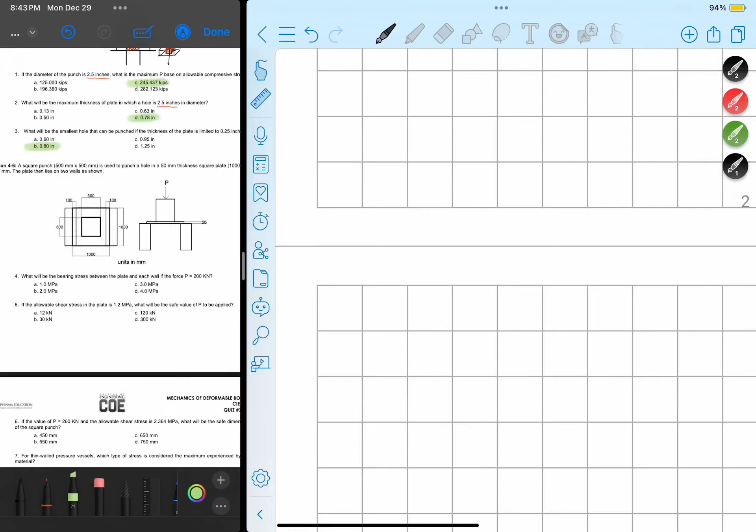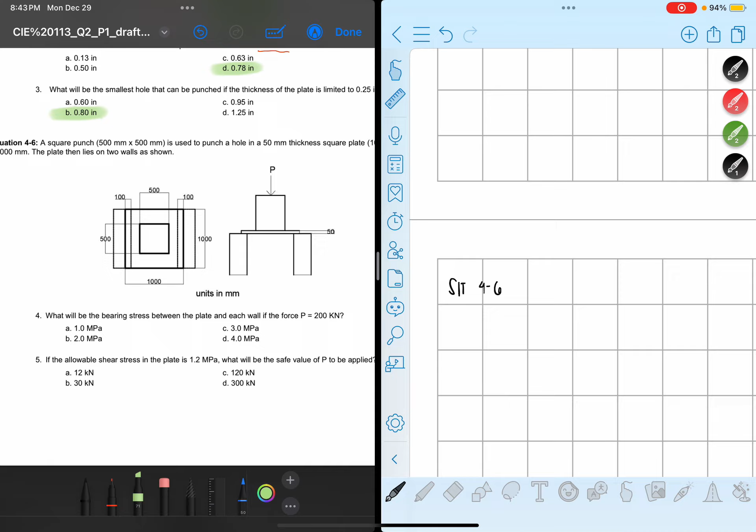Okay, for this problem, situation 4 to 6. We have a square punch, 500 millimeter by 500 millimeter. Ito yung square punch na tinutukoy natin. In top view, asan may 500 by 500 yan? Ito, yan yung 500 by 500 natin na punch.

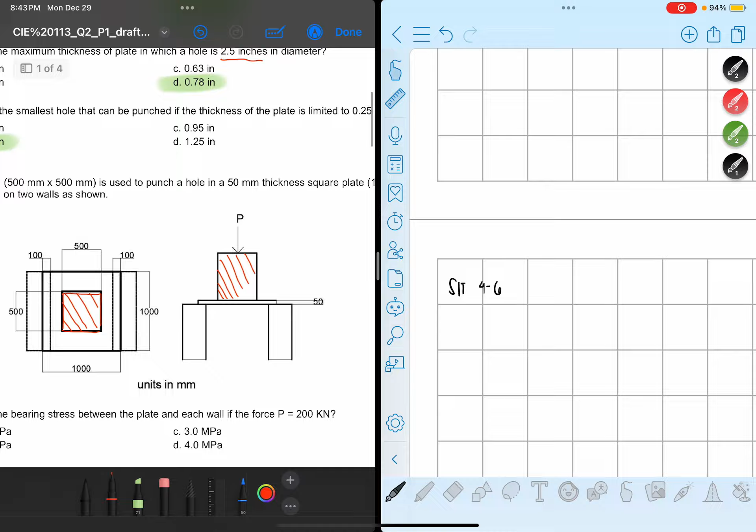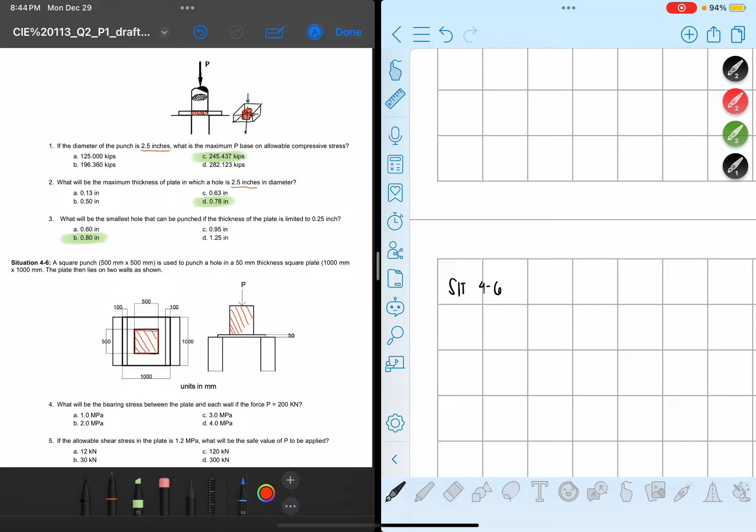This is used to punch a hole in a 50 millimeter thickness square plate. Nakalagay na lahat dyan, pero i-isa-isa natin. So, 1,000 millimeter by 1,000 millimeter, yun yung dimension ng plate natin, 1 meter by 1 meter. Then the plate lies on two walls as shown. Ito yung wall na tinutukoy ko sa inyo. This is your wall.

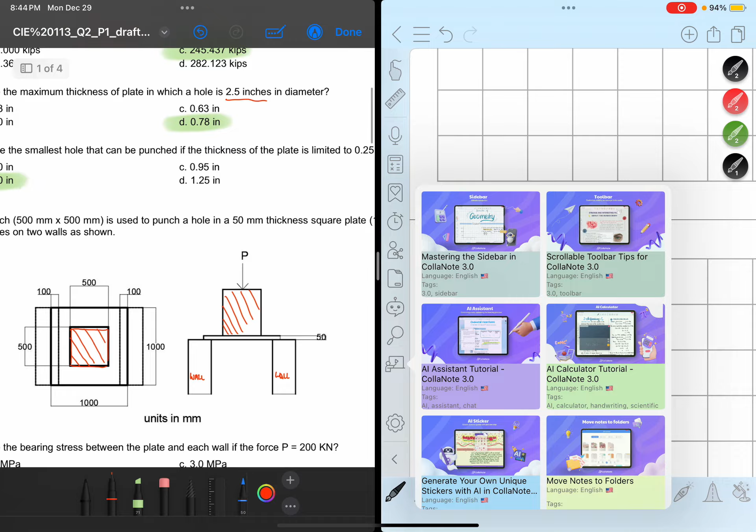Now isa-isahin natin. For situation or problem number 4, ang tinatanong sa atin, what will be the bearing stress between the plate and each wall if the force is 200 kilonewton?

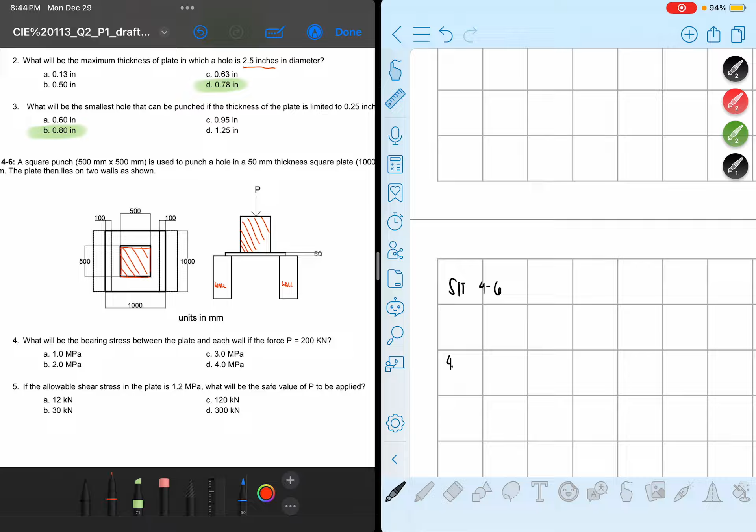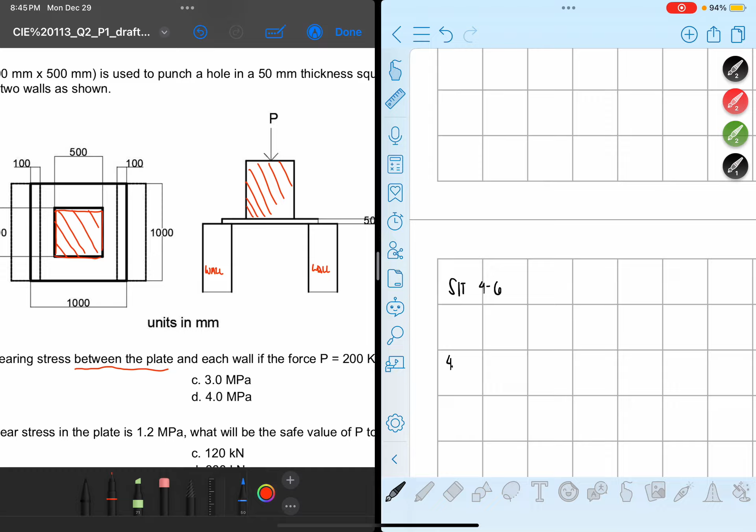Nalito na sila sa bearing stress. Tingnan nyo mabuti, pag merong sinabing bearing stress, is the contact stress between two different bodies. Sinabi na dyan, between the plate and each wall. Actually madali lang tong problem kung na-analyze nyo mabuti. Ibig sabihin, nasaan yung contact area natin dito? Asan mo muna yung plate?

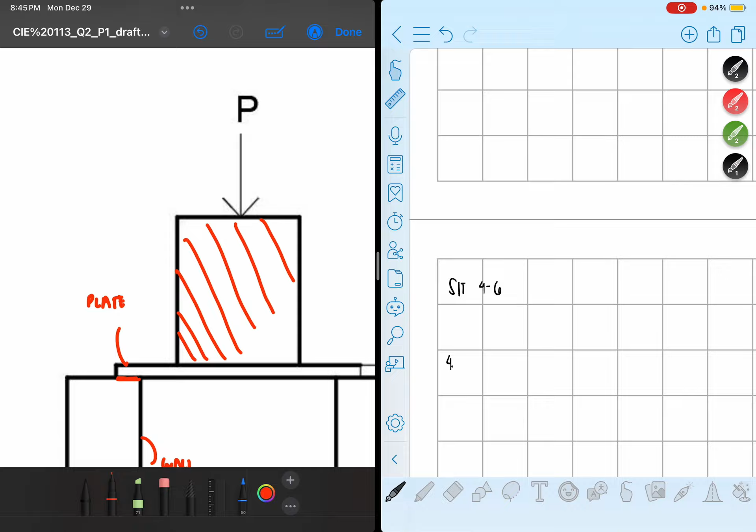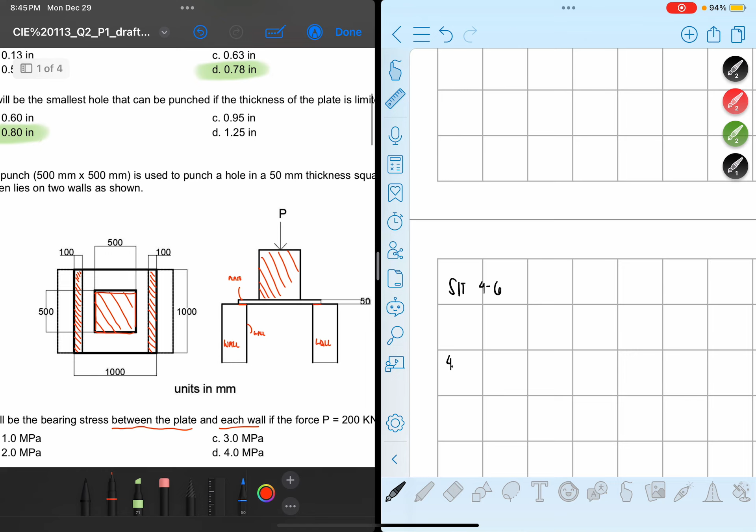This is the plate, this is the wall. If the bearing stress is the contact between two opposing bodies, pwede ko bang sabihin na ang area natin na kino-consider is ito? Pag ganyan yung view, at sa top view naman, pwede ko bang sabihin na ito yung area na yan? Kasi yun yung contact area nung ating plate at ng wall. Isa lang naman ang tinutukoy sa atin.

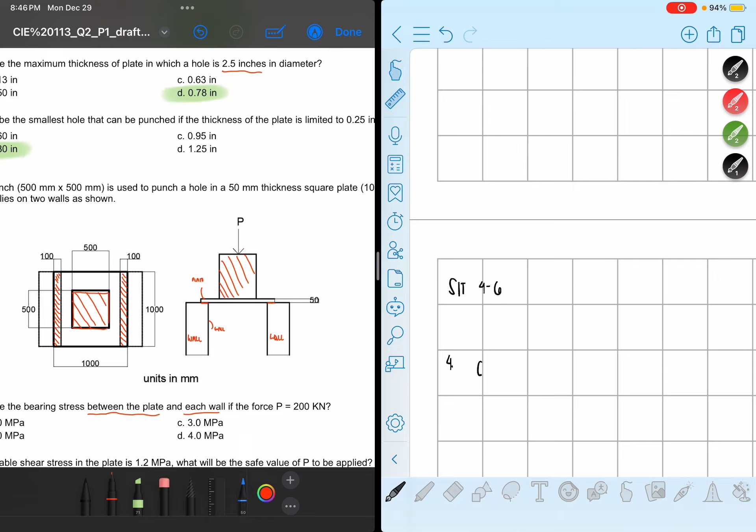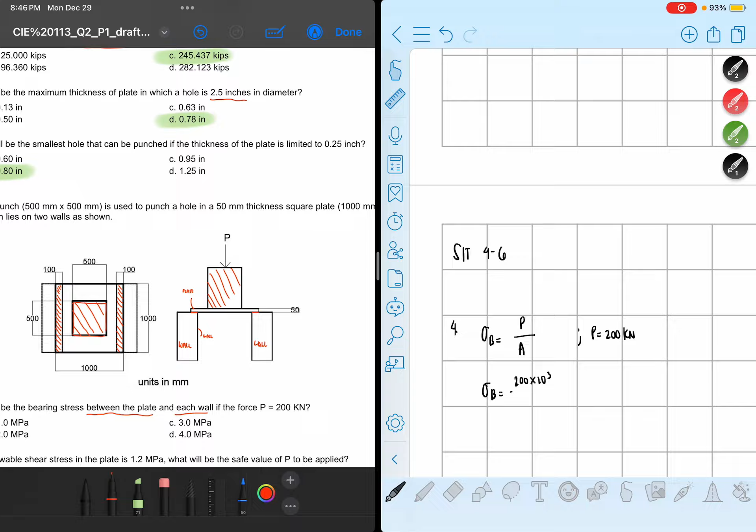Ngayon, paano natin mahahanap yung force dyan? Pag ginamit mo dyan is force P. Tingnan nyo mabuti, titingnan natin muna. Siyempre, bearing stress yung hinahanap natin, so we have force over the area. Ang force na tinutukoy natin, ang P, is 200 kilonewton. So we have 200 times 10 raised to 3. Sige, gamitin natin yung area na sinasabi mo.

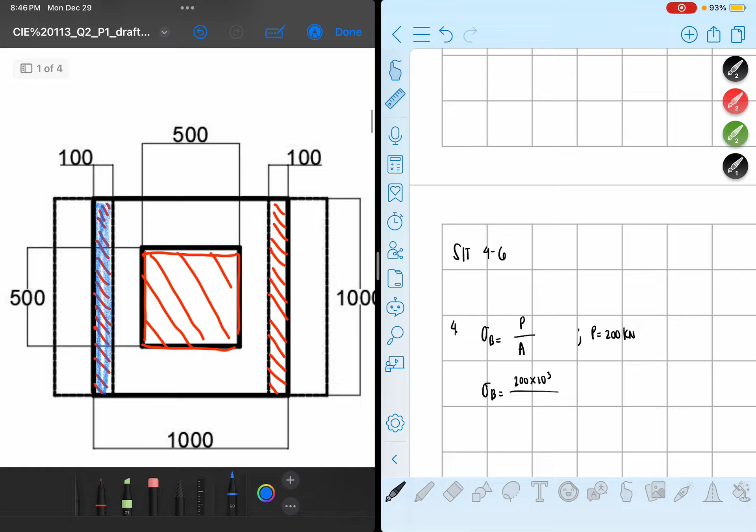Ibig sabihin, yung area na to, i-green ko, yung area, ano ba? Yung blue na yan, is simply madali lang, 100 times 1,000. Ibig sabihin, ang makukuha ko dyan is simply equal to 200 times 10 raised to 3 divided by 100 multiplied by 1,000. So ang makukuha ko dyan is 2 MPa.

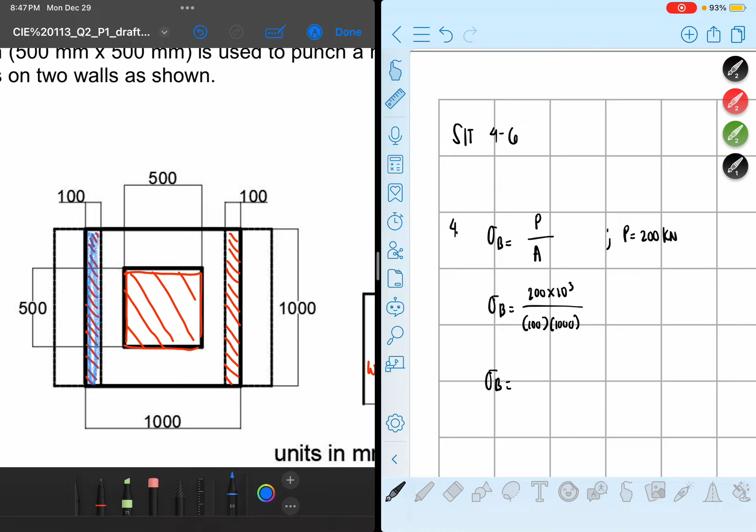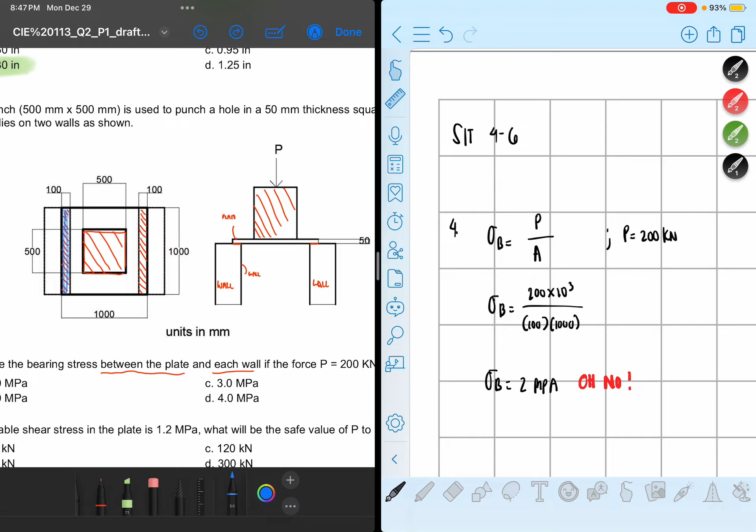Wow, lumabas sa sagot, pero mali. 2 MPa, lalagay ko dito. Hulaan nyo, oh no, okay bakit po mali? Kasi guys, kung tatandaan nyo mabuti, if bearing stress ang pinag-uusapan natin, always lagi naman to, kahit hindi bearing stress, kahit normal stress lang tayo, tatandaan nyo na kapag gumagawa kayo o nagsosolve ng mga stresses, always make sure na meron kayong free body diagram.

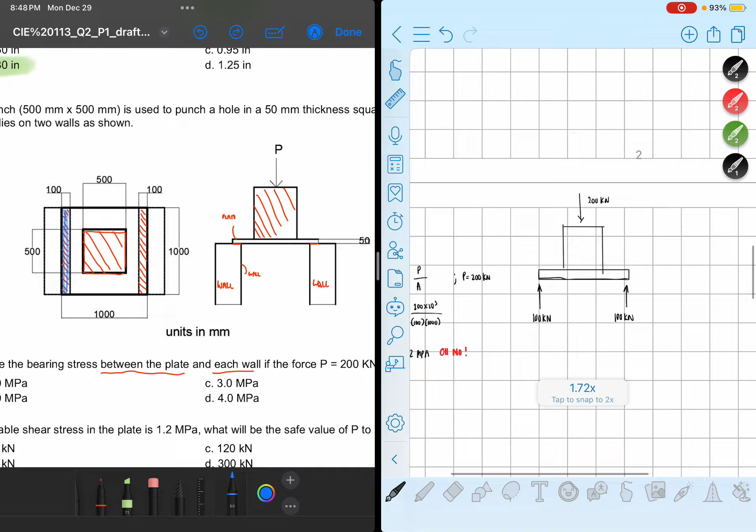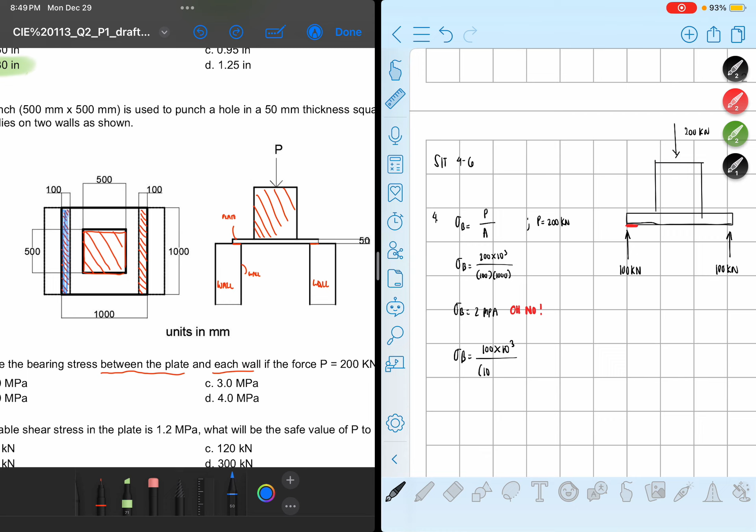Kung paghahatian nila yan, pwede ko bang sabihin that this is equal to 100 kilonewton? If that's 100 kilonewton, ibig sabihin yung force na kinakarga nung isang wall natin dito, andito yung contact area na yan. Okay, ibig sabihin, ang force na kinakarga ng isang wall natin is simply 100 kilonewton lang. So ibig sabihin, the bearing stress is simply equal to 100 times 10 raised to 3 over the same area, 100 multiplied by 1,000. Ano ngayon yung magiging bearing stress natin? So ibig sabihin, 100 times 10 raised to 3 divided by 1,000 multiplied by 100, this is simply equal to 1 mega or 1.0 megapascal.

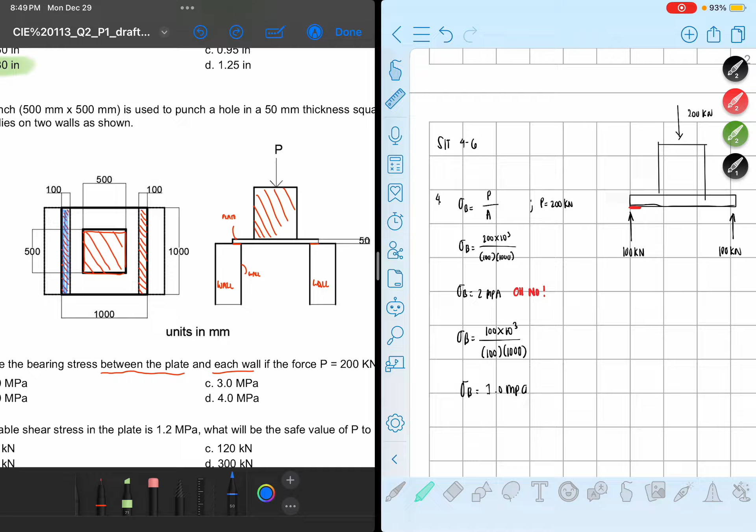So this will be the correct answer. Ang correct answer natin is 1.0 megapascal. Sa nagsagot ng 2.0 megapascal, okay lang yan, at least ngayon alam mo na.

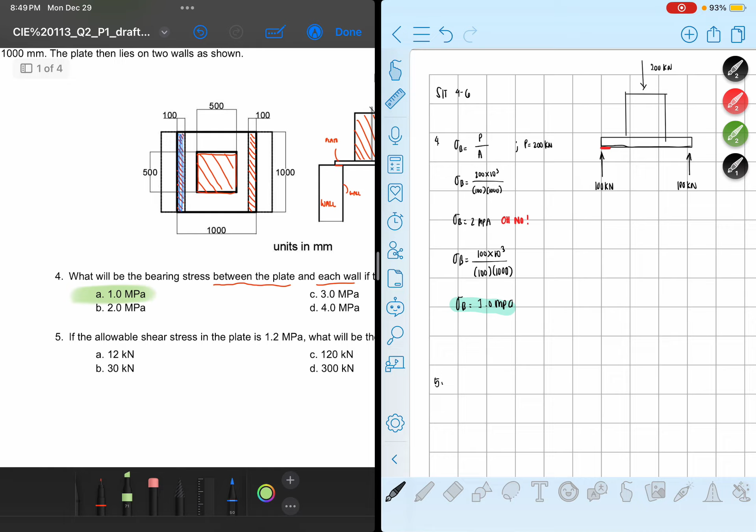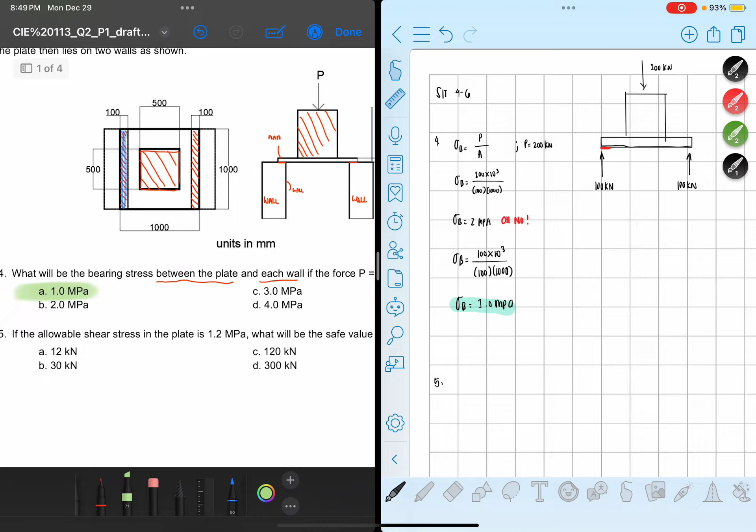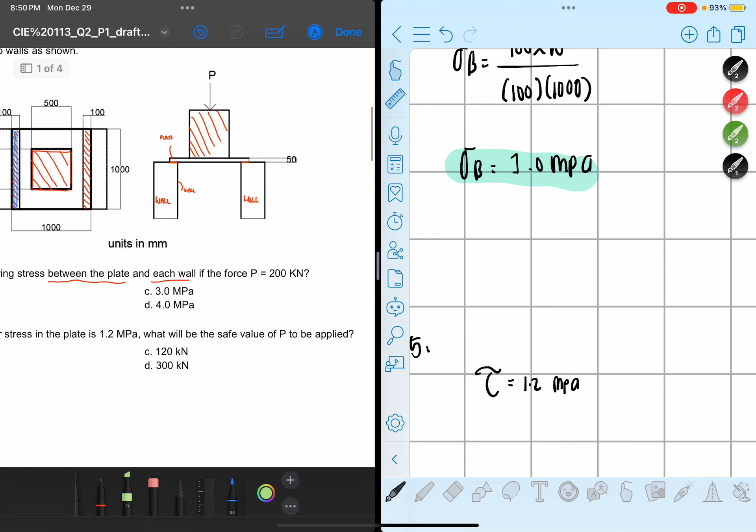Okay, so for number 5, if the allowable shear stress in the plate is 1.2 MPa, what will be the safe value of P? Actually madali lang to. Sabi naman dito, meron kang allowable shear stress, ayan na pala, shear na pala sinabi. You have the allowable shear stress, 1.2 MPa, what will be the safe value of P to be applied? Ibig sabihin, limited lang daw yung shear stress between the punch and the plate. Kung titingnan nyo mabuti, we have 1.2 is simply, madali lang, yung P lang kino-consider natin. However, shear stress yan, meaning ang maapektuhan dyan is yung ito.

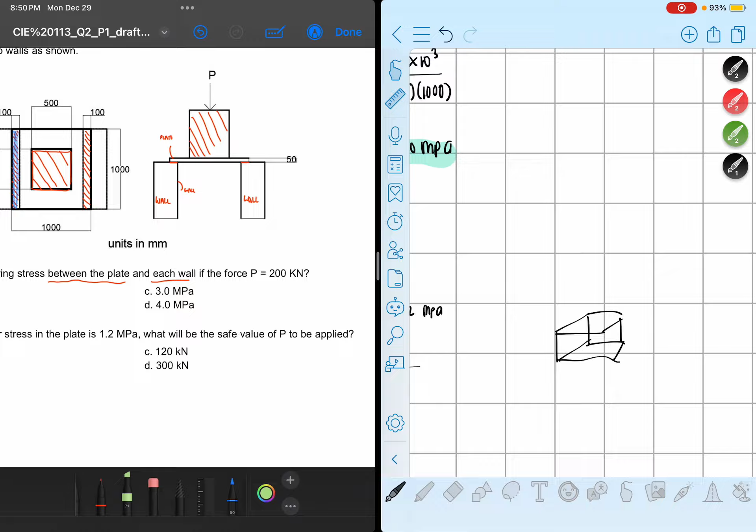Okay, ay ang pangit, gawa tayo medyo malaki.

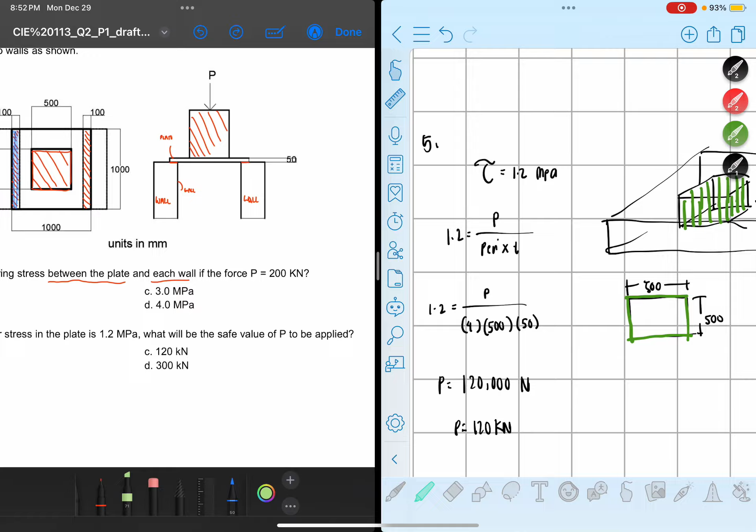I can already see the answer, letter C. Our answer is letter C, which is 120 kilonewton. Wasn't that easy? Next, for number 6.

If value of P is equal to 260 kilonewton and the allowable shear stress is 2.364 MPa, what will be the safe dimension of the square punch?

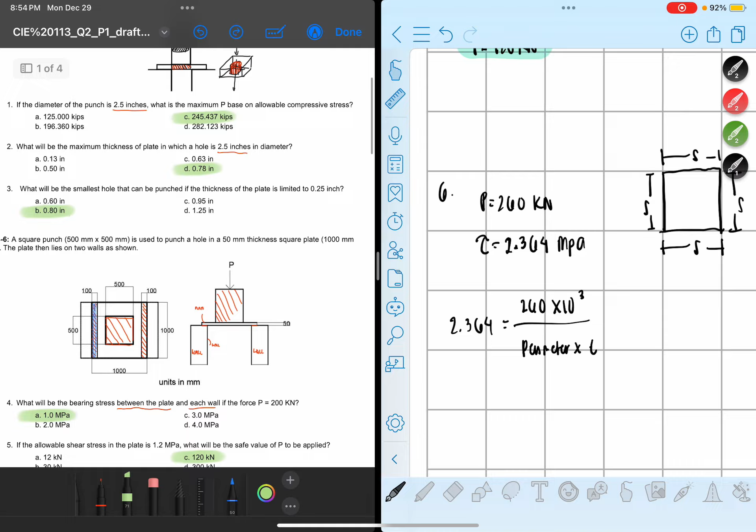Or S plus S plus S plus S. So let's do it. We have 2.364 is equal to 260 times 10 raised to 3. Since you don't want 4S, you want to use S plus S plus S plus S multiplied by the thickness, which is 50.

Okay, so how do we get the value of S, the safe dimension? So, 2.364 equals 260 times 10 raised to 3, S plus S plus S plus S. You get approximately 549.9.